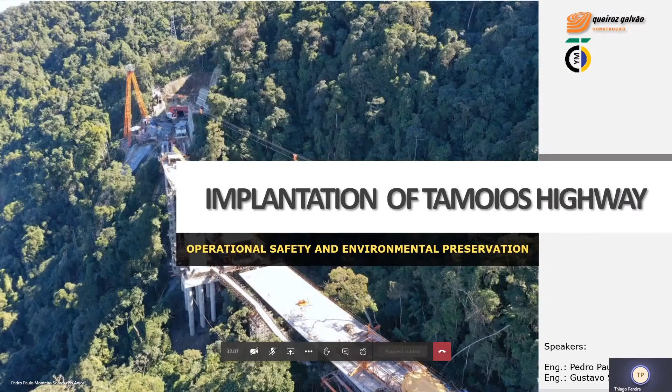Hello everyone, good afternoon. So in our lecture today, Pedro Paulo Anjos is going to present a lecture about the implementation of the Tamoios road project. Pedro is 29 years old. He had an exchange in England back in 2012-2013 to learn English. He's a civil engineer, graduated in 2013 at the Federal University of Campina Grande. In 2014, he joined Queiroz Galvão, a Tier 1 contractor in Brazil for major infrastructure works. And in 2016, he completed an MBA in project management at FGV.

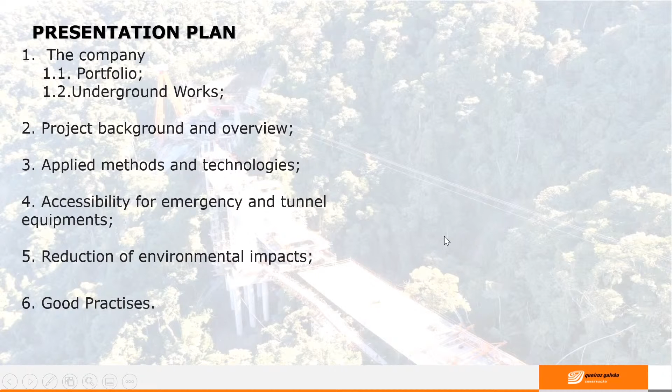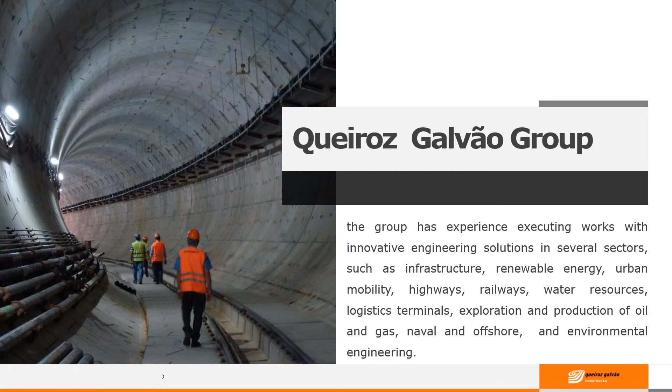So here we have a summary of the Queiroz Galvão group, with more than 67 years of history. The company operates in national and international markets and has experience executing work with innovative engineered solutions in several sectors, such as infrastructure, highways, airports, bridges, pipelines, buildings, railways, subways, power tunnels, power generation, and underground works. In this segment, we have more than 300 kilometers executed.

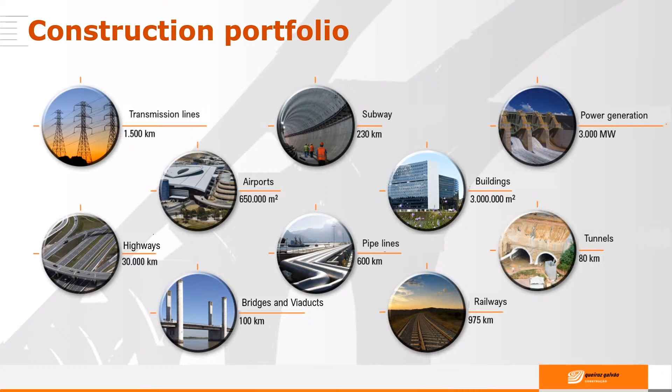As we're talking about tunnel works, I'm going to show quickly some other important projects of the company. This work in Brazil was the Metrofor, in the northeast of Brazil, as you can see on the map. It was a work with the cut and cover method, with diaphragm wall.

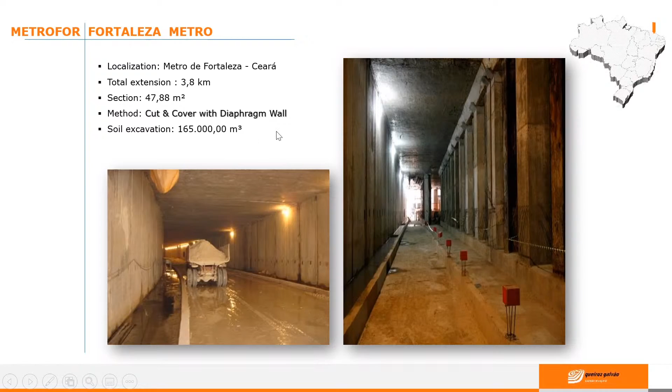Here we have Line 5, the Metro of São Paulo. The method here was the NATM and the TBM. In this case, the NATM was used to do the shafts and the TBM for the tunnels.

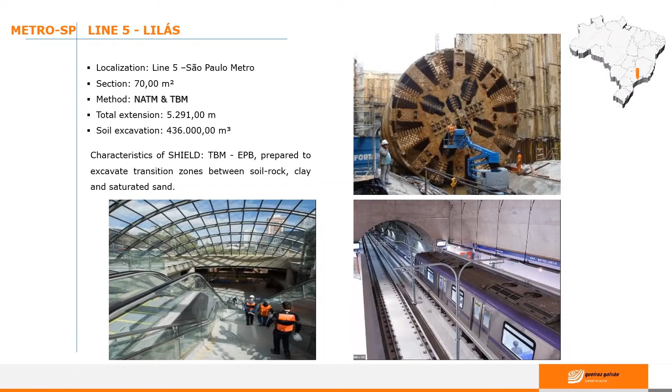Here we have Line 4, the yellow line, São Paulo Metro. The method used was the NATM and TBM. In this case, we have 4.6 kilometers of NATM tunnels and 6.3 kilometers of TBM tunnels.

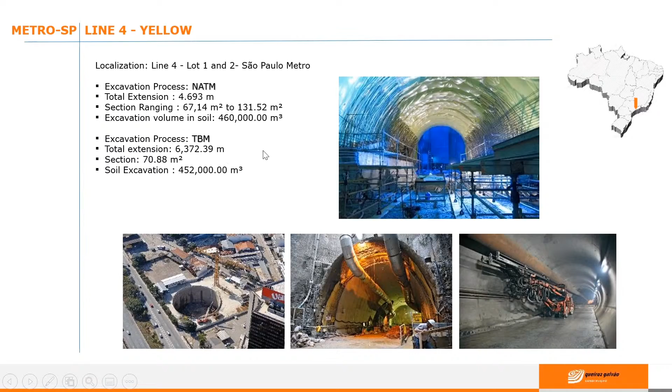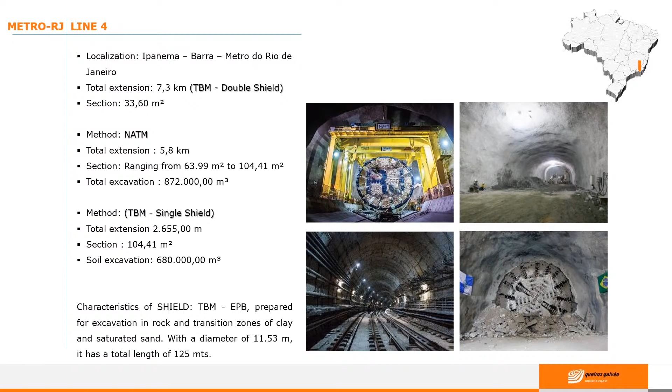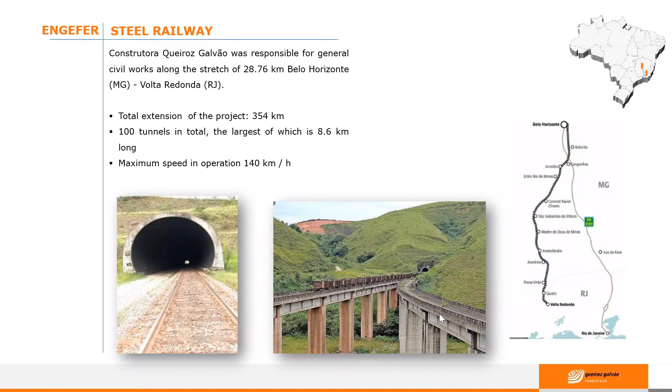We have here the railroad tunnels. This one was made to create a connection between the countryside of Minas Gerais, a rich region in iron ore, and a region in the state of Rio de Janeiro, a steel industry region. Queiroz Galvão construction was hired to build a lot with almost 28 kilometers. The total extension of this project was 354 kilometers and almost 100 tunnels in total, the biggest one with 8.6 kilometers.

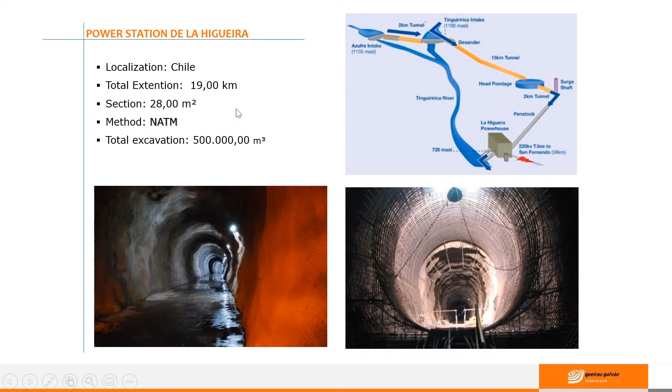Some hydraulic tunnels. Here we have a work in Chile. It was a power station in La Higueira, in the city of La Higueira. In total, we have 19 kilometers of NATM tunnels.

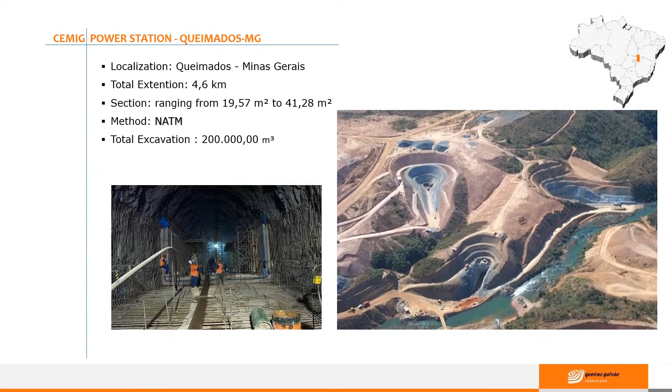Another power station, Queimados, now in Brazil, in the southeast of Brazil. We had a total extension of 4.6 kilometers, and the method used was NATM.

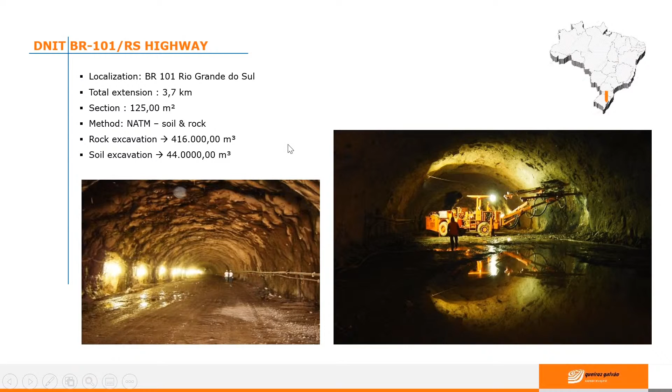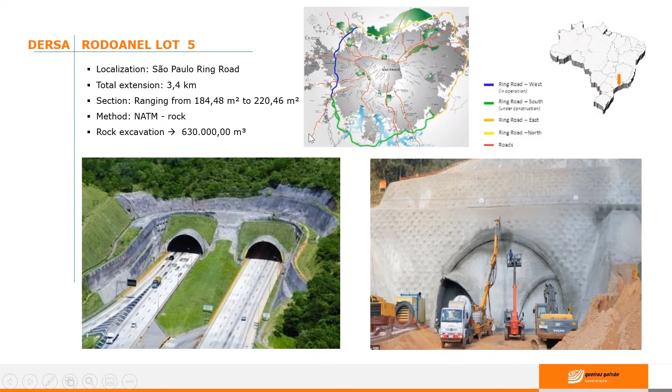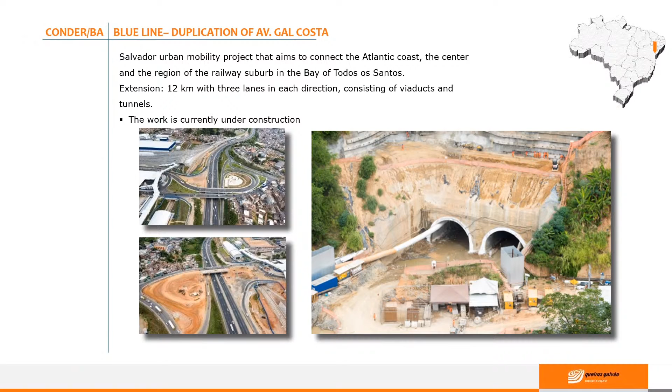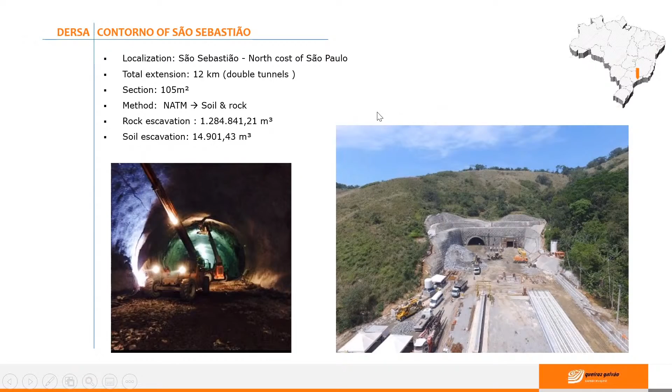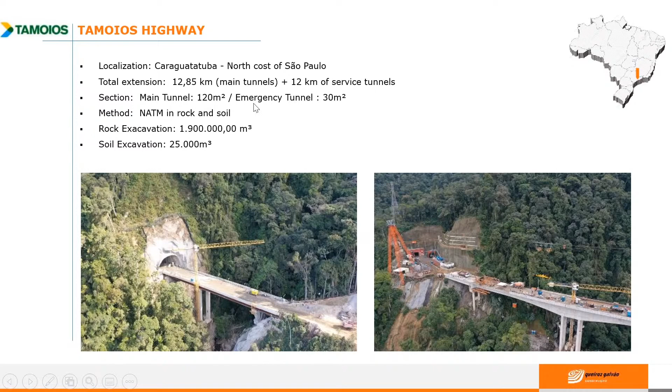The Tamoios Highway crosses the Serra do Mar State Park. The duplication of the Tamoios Highway will provide more safety for users with smoother ramps, less sinuous roads, and more open curves. In addition, it will improve the flow capacity of products to the port of São Sebastião, moving the economy.

Due to the differentiated technology solution to reduce impact on the Atlantic rainforest, the project received in 2017 the Eco Sustainability Award from the American Chamber of Commerce, an international entity.

Here we have some technical information. We have almost 22 kilometers of main track. We have 6.1 kilometers of earthwork, 12.8 kilometers of road tunnels, including the biggest one in Brazil with 5.5 kilometers, and we have 2.5 kilometers of bridges.

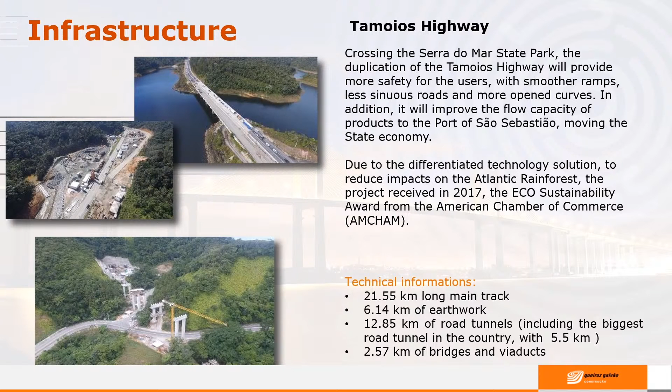It's important to say that almost 85% of this work is inside the Serra do Mar Park. It is located in an environmentally protected area with several species of animals and plants. So more than 80% of this work is inside a protected area.

From a technical point of view, the relief of the mountain makes it difficult to build tunnels in this area, as we have a region with many valleys and hills associated with heterogeneous geological conditions. The weather conditions are another important factor, since we are talking about a tropical forest.

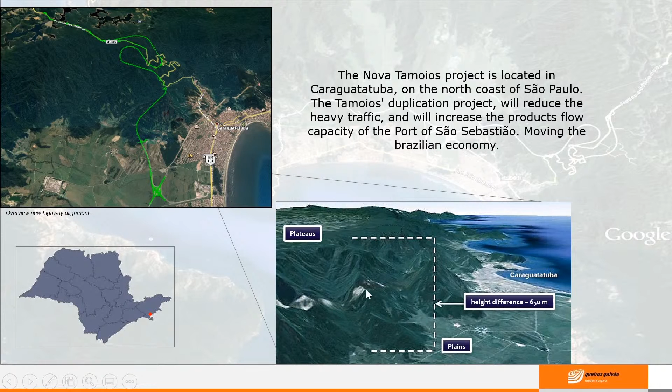Yes, those were the big challenges here, to bring the highway from the top of the mountain to the sea level, and also to build the viaducts and tunnels inside a protected area. So I think if we summarize, those are the challenges.

This port, in special, has better conditions of operation than the port of Santos, one of the main Brazilian ports. It's a secondary port for the state. With this, we have an important project for the economy of the state and the economy of this country.

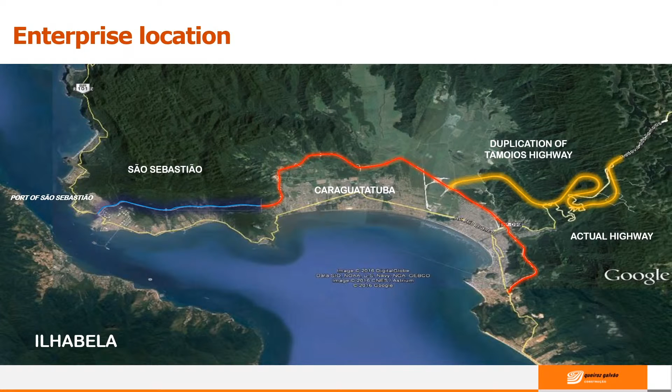So we have here the layout of the work, the Tamoios duplication. Here we have the actual road to access the north littoral, and here the old one, as we name it. This project includes the construction of 10 viaducts, as you can see here in yellow, and 4 tunnels. In total, we have a stretch of 21 kilometers of extension.

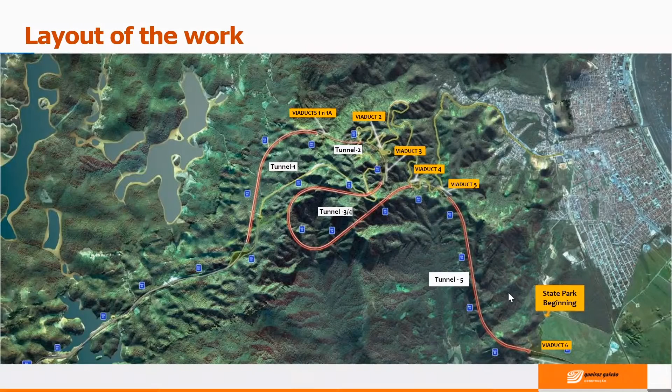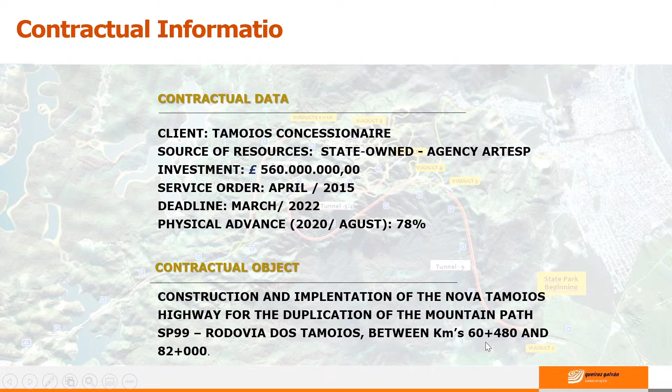and the deadline is March 2022. Today we have a physical advance of around 78%. The object of this contract is the implementation of the Nova Tamoios Highway and the duplication between kilometers 60 and 82.

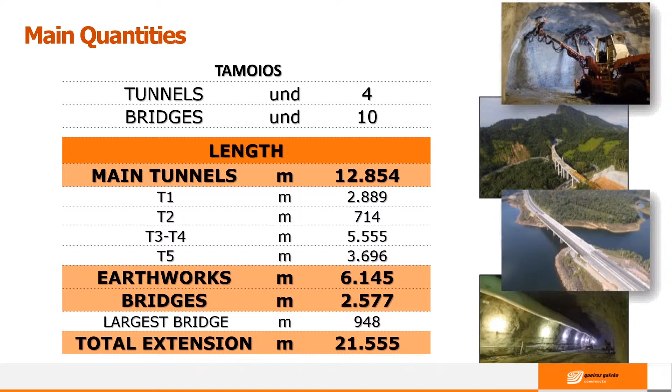The main quantities of the service: we have excavation of almost 2 million cubic meters of excavated material, concrete paving and asphalt paving, almost 50,000 cubic meters, shotcrete and structural concrete around 260,000 cubic meters of concrete.

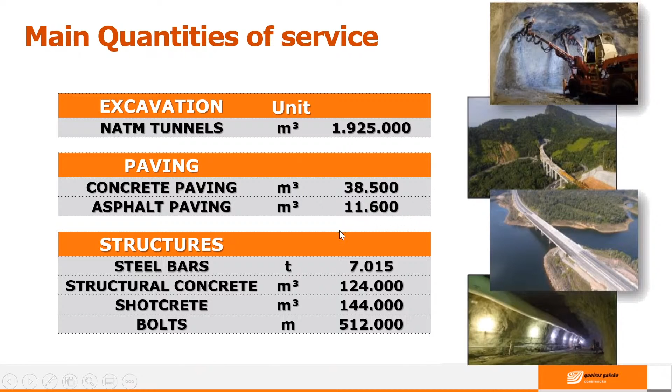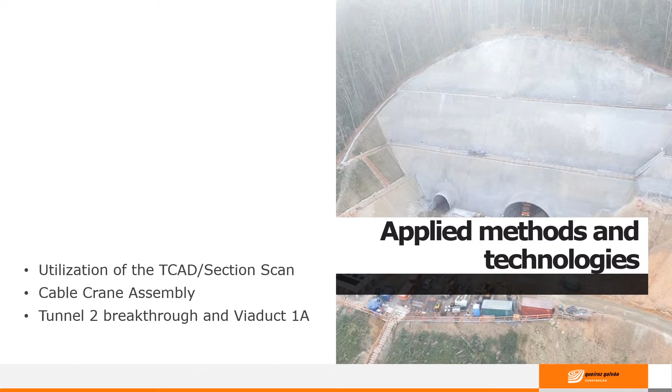So we have here a sum up. We summarize some topics, and we are going to talk about the sequence. We have the utilization of the software TCAD, the section scan, the cable crane assembly, the tunnel 2 breakthrough, and the viaduct 1A. So we have here the applied methods and the technologies of this giant work.

Just to explain, the NATM is a commonly used excavation method using the drill and blast technique, consisting of rock drilling and detonation of explosives in the tunneling fronts in rock masses. So we have some stages of the cycle, and Gustavo, if you want, you can add some. Sure. It's a pretty common method.

First, we have the geological mapping with the topography team, then the front drilling with the boomer. After this, we have the explosive loading, then the detonation, and after that, the ventilation system for gas removal. Then we have both mechanical and manual scaling, and finally, the shotcrete, or sprayed concrete. And the cycle repeats over and over until the tunnel is done.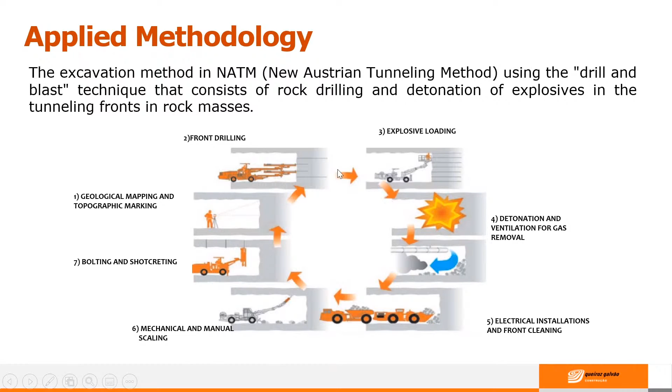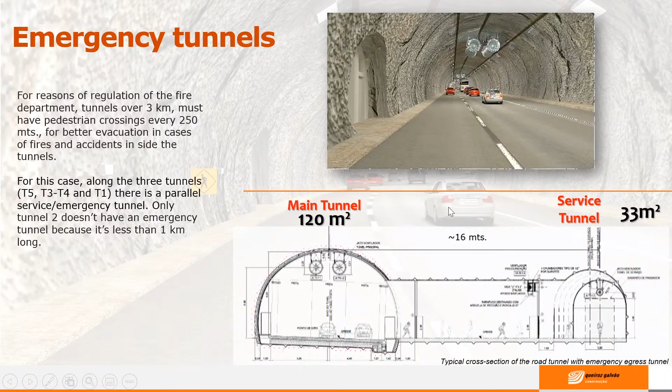So, as we said before, every 250 meters we have to have a connection tunnel. But in this case of tunnel 3-4, as we are talking about a tunnel with 5.5 kilometers, the fire department regulation demands a massive extraction or a ventilation tunnel. This ventilation tunnel will be equipped with 6 fan jets with 150 horsepower each, which will be activated in special cases such as fire or high gas concentrations.

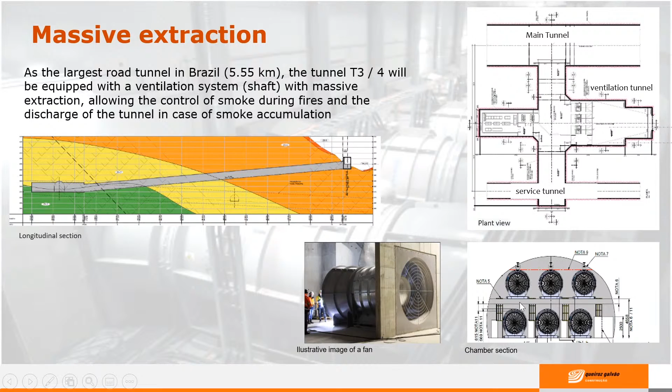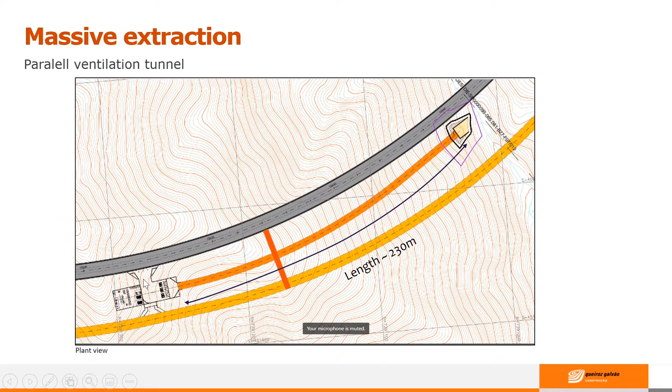So we have here the service tunnel and the main tunnel, and between them there is a chamber with the power plant, and we can see here the six fan jets for the massive extraction. So we have here a plant view, and we can see in this region we have many types of excavation section: the main section, the service section, the connection, and the shaft section. We can see here the chamber with the operation, a control room, and a power plant of this tunnel when in operation.

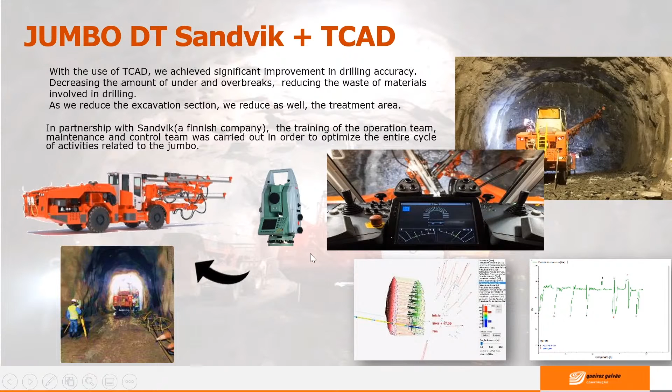Here we will talk about the jumbo system. It's not an innovation, but as we're working with 80% of tunnels, it becomes a crucial tool to perform the tunnel cycle and the excavation control. We bought at the beginning of this work 6 pieces of equipment like this. This model in specific has 3 booms and the TCAD system. We have here some examples of the reports. We can export information like drilling speed, water pressure, hole depth, and other important data for the operator in real time.

So we have a significant improvement in drilling accuracy, decreasing the amount of under and over break, reducing the waste of material involved in drilling. And this is a partnership with Sandvik, a Finnish company, and all the operators and maintenance staff were trained to control and optimize the entire cycle of activities related to the jumbo.

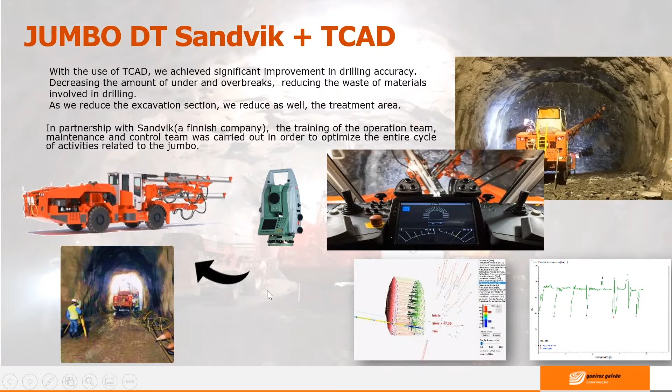So we have here the topographic equipment, a total station. It is a robotized station, and this equipment is responsible for the geopositioning of the jumbo; it locates the drilling holes and maps the excavation section. With the aid of an autonomous system, we are able to collect information and compare sections in real time. This technology guarantees the treatment of under break points and drilling adjustment for the next blasts, minimizing rework and loss from over excavation.

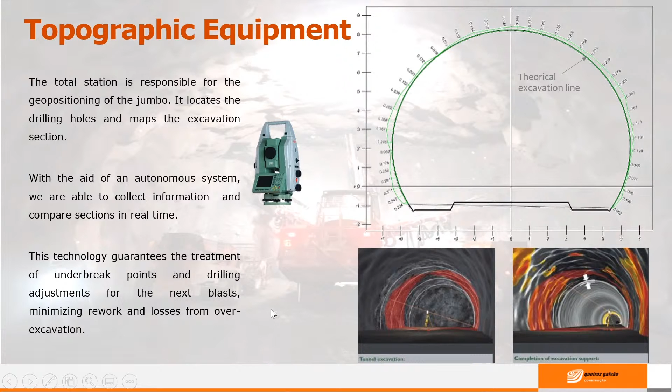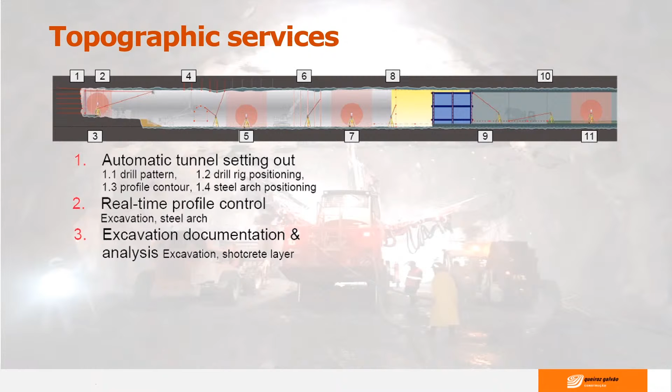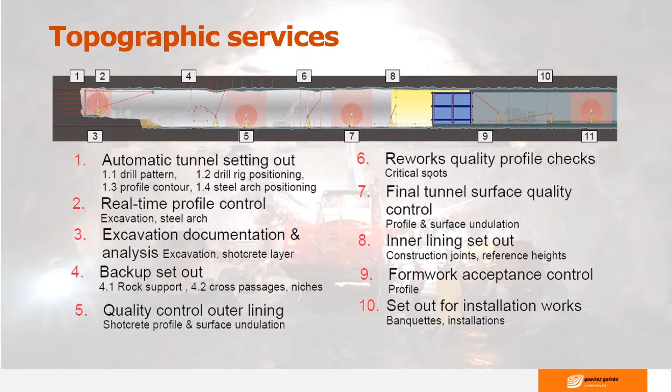These slides represent an important stage, for which the topography team is responsible. It is one of the most important teams in underground works. Here are all the services the topography team executes in a tunnel excavation. As you can note, they participate in all stages of the excavation cycle. So we can control the quality of lining, have the real-time profile, set up the section, and other services we can control in real time: the shotcrete, all the treatment, the excavation and others.

It's important to mention this work in Brazil today is the first one to use only polypropylene fibers to resist fires and structural loads. This can be achieved by adding micro and macro fibers to the shotcrete mix. It's important to mention again, we are doing a pioneering thing here in Brazil because we are doing the tunnel lining with 100% synthetic fibers, and this solution brings other advantages for the shotcrete and the excavation cycle.

Another interesting point is that with the results obtained in this work, we are preparing together with other technical institutes the Brazilian standard for concrete reinforcement with polymeric fibers. This is an innovation of this work. By changing the steel mesh for these fibers, we are achieving a safer, quicker and cheaper way of working as the result of this change.

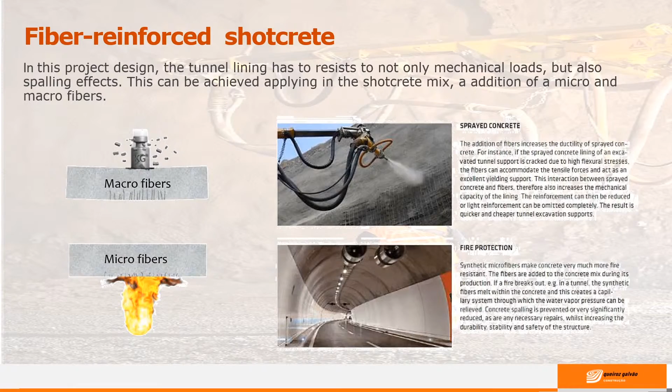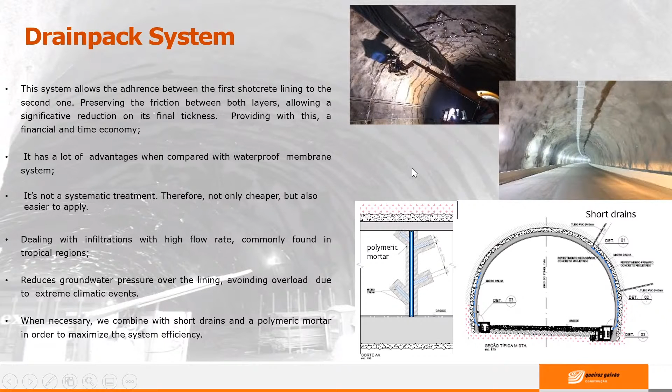So nowadays, the environment has been a central subject in discussions about society in the last decades. When we were studying the project, our prime goal was to attend the environmental and the contractual regulations and the good practice of engineering. So let's talk about the most important innovation of this work, the cable crane.

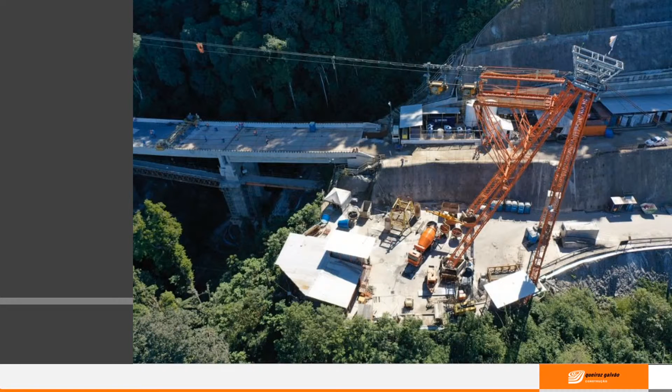So from the beginning of this project, the company looked for different solutions around the world to avoid the execution of this service way, as you can see here in this orange line. That would suppress more than 40,000 square meters of rainforest, a big impact in the Atlantic forest. Because of our short deadline, we had to start the viaduct three and the tunnel three at the same time.

That's why we had to employ this pioneer technology in Brazil. So it's the first cable crane assembly here in Brazil. So it was a hard mission to do this for the first time.

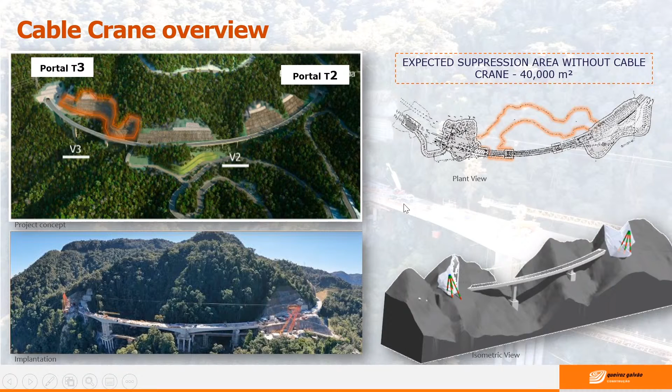As you can see here in this overview, we designed the position of the track rope, the red line here, aligned with the main supports of this bridge to aid the execution of foundations, columns, and other structures of this viaduct. Yes, the track rope is right here. It's placed here because of the viaduct's main supports, and also to help in transporting the rocks from the tunnels to their final destination.

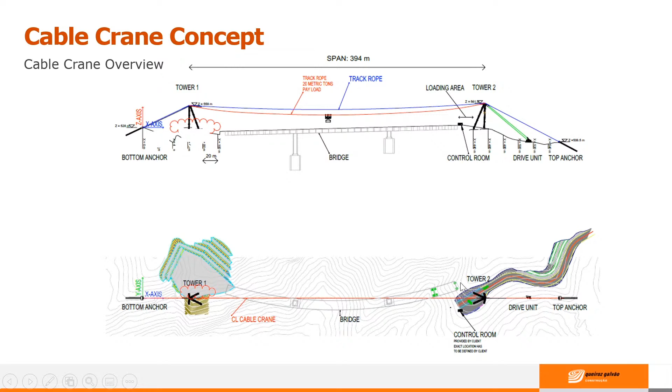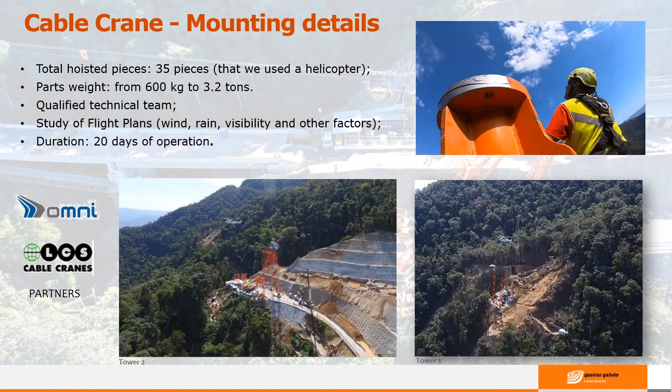So let's talk about the cable crane mounting details. In the case of Tower 2, we could assemble with a regular crane, because we had enough space to do the operation. As you can see here, we have all this space and we can do a regular or standard operation. However, for Tower 1, that was not possible. This region here was unreachable. As you can see, the helicopter and all this earthwork here. That's why we decided to install each piece using a helicopter.

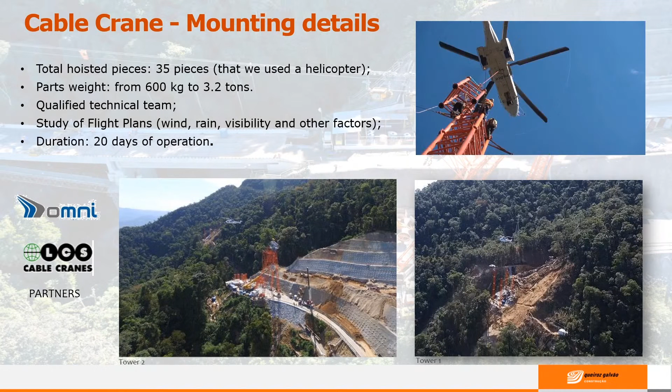As you can see in the video, this is tower one. This is in a remote region inside the park. So it was very hard to get the park's authorization to do this operation, but we can prove that there was no impact with this operation.

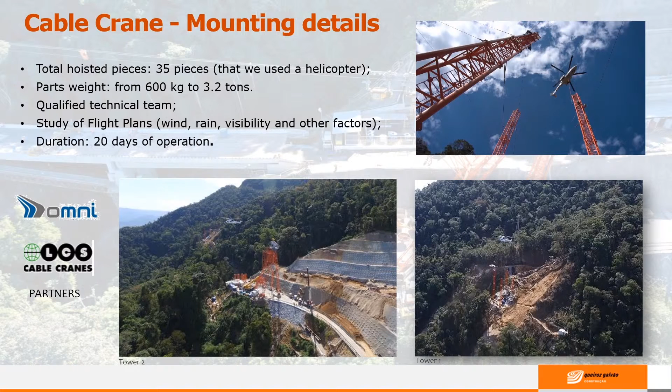So we have a partnership with Omni. They're responsible for the helicopter, and another partnership was LCS, the cable crane construction. But the whole project was made together with LCS, Omni, and Queiroz Galvão. So all this operation was made together. We have here some technical information about the cable crane.

The distance between towers, tower 1 and tower 2, is 394 meters. The track rope diameter is 65 millimeters. The load capacity, about 20 tons. The travel speed, 4 meters per second. And the tower height, tower 1 with 42 meters and tower 2 with 35 meters. As you can see in the videos, we can carry any type of equipment.

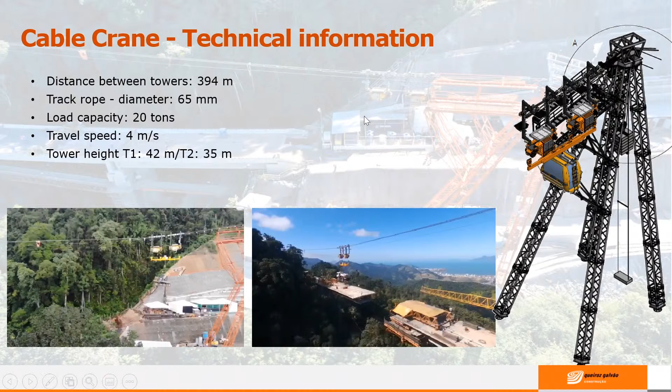Yes, I was in charge of the night production shift here in Tamoios, and the cable crane was essential. Every steel bar, every concrete, every formwork, every equipment in general was transported by the cable crane, so it helped and was essential.

So we have here some operational data. The period of operation was from March 2019 until August 2020. We worked 7,200 hours. The soil and rock transportation, more than 220,000 tons. The concrete volume, more than 10,000 cubic meters, and the mechanical availability approximately 90% utilization of this equipment.

So it was very efficient for this work and very important to us for the conclusion of this bridge. And we could anticipate the deadline of this bridge by almost 2 months, and we could anticipate the tunnel by close to 5 months.

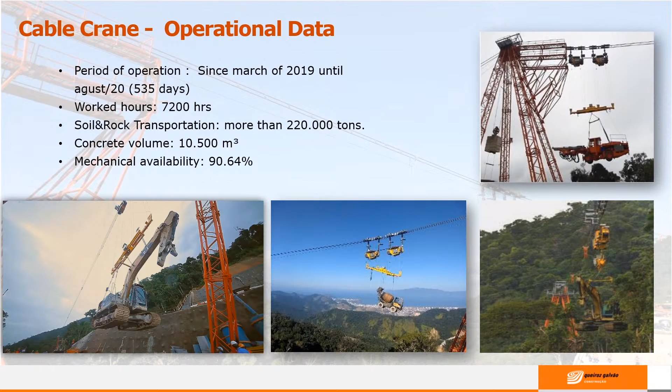So we have here another solution, the pedestrian walkways, to optimize the path along the viaduct 3 and to access the main supports. With this, we can reduce the dislocation time of the workers, and we can avoid unnecessary suppression below the bridge.

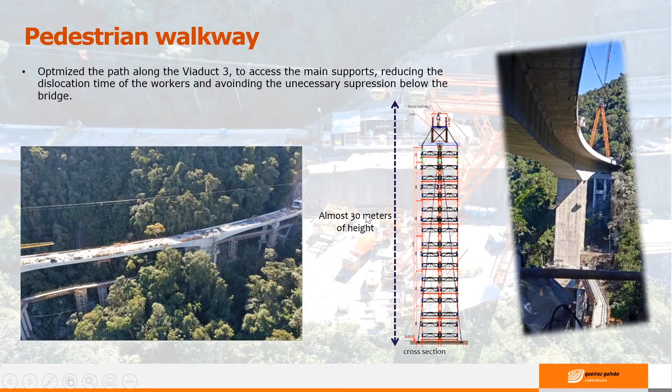Okay, we can see here the tower, the height of the tower, almost 30 meters of height, and we can assemble this tower with the aid of the cable crane too. Okay, so for this, the cable crane supports all the operation in this assembly.

So in the basic project, we expected to have an impact over 700,000 square meters. However, with all the engineering solutions, we had a positive impact, reducing close to 40,000 square meters of suppression at the Atlantic forest, the equivalent to 6 football fields like the Wembley Stadium.

So we can see the reduction was very important for this work, and we can finish this bridge, and the cable crane supports this goal.

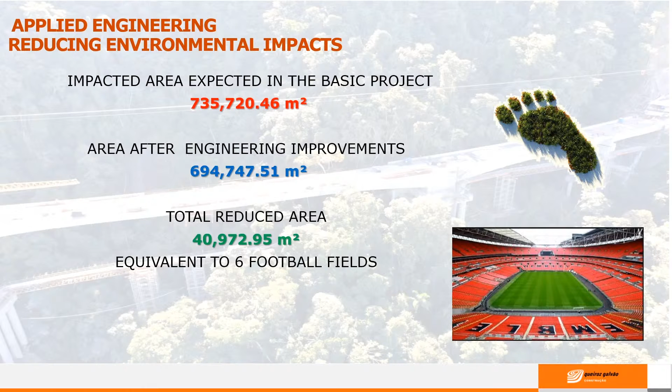Now let's talk about the water treatment stations. Just so we have an idea, during the drilling process of the tunnel, the boomer consumes about 40 cubic meters of water per cycle of excavation. So a work like this, with this proportion, can consume close to 400 cubic meters per day.

So this system was developed in closed circuit. All the captured tunnel effluents, the infiltration water or post-drilling water, pass through the treatment station. Therefore, there is no risk of dirty water disposal, providing protection for the environment and reducing the operational costs. So each tunnel has a water treatment station to treat all the effluents.

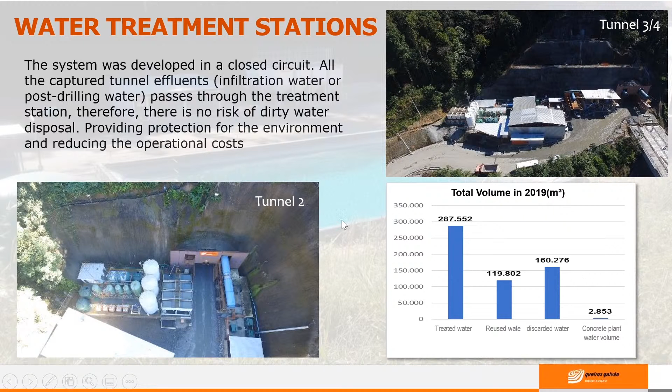We can see in this graph here the total volume in 2019 in cubic meters. We treated almost 300,000 cubic meters. The reused water was 120,000 cubic meters, and discarded water and concrete plant water volume, that is other volumes of water, all of them treated. We use more volume of treated water than our well. So with this we can avoid unnecessary natural water consumption.

Our primary reused water destination is the tunnel drilling to attend to the demand of the jumbo, the equipment washing, the crushing plants, and the access routes for wetting. So just so we have an idea of how much we treat, in 2019 we treated the equivalent to 115 Olympic swimming pools.

So we can see other images and the quality of this water. We control all the parameters like pH, sulfates and other parameters of control of this water. And this water is potable.

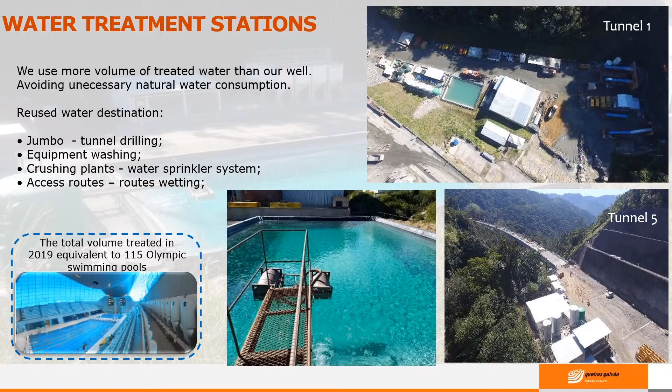So we have here the crushing plants. This is a substantial project, and the total volume of earth moved, including rock generated by the tunnel excavation, will reach 2 million cubic meters. Much of this excavated material will be used in concrete, in the asphalt plants, and the soil plants. The volume necessary for all civil works will demand more than 300,000 cubic meters of concrete.

Yeah, basically we take the rocks from the tunnels, we drill, and then we have the crushing process, getting the gravel and the rock filler, and we use them in the shotcrete, our sprayed concrete, in our concrete, and in our paving, reducing natural waste and costs.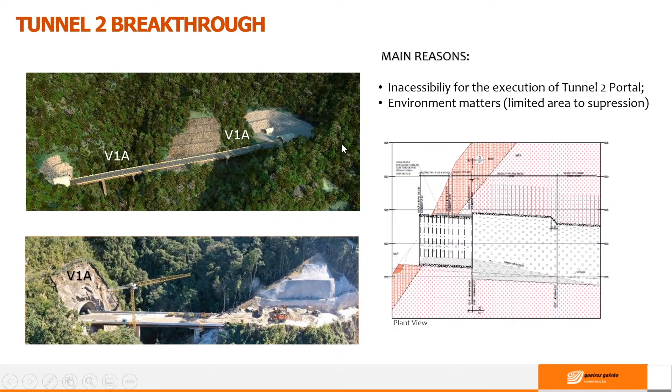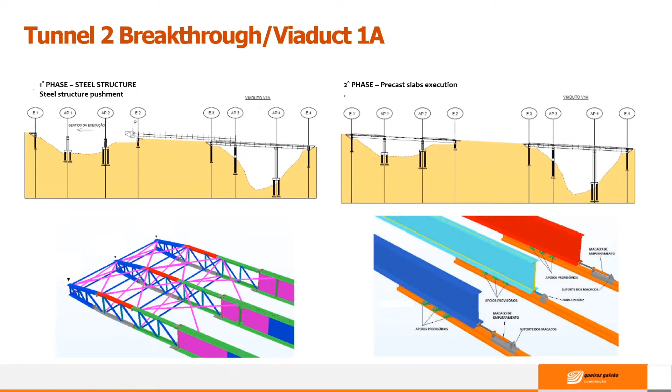To save time in the execution of the viaduct, we thought of a solution to assemble the viaduct inside the tunnel and then push it with hydraulic jacks over the supports. So with this, we can save time and we can deliver this bridge to the client by the deadline as demanded. So that's the good practice of this contract.

And the tunnel 2 breakthrough in viaduct 1A. It was a differentiated solution, saving time and protecting the environment. So with this, I think we